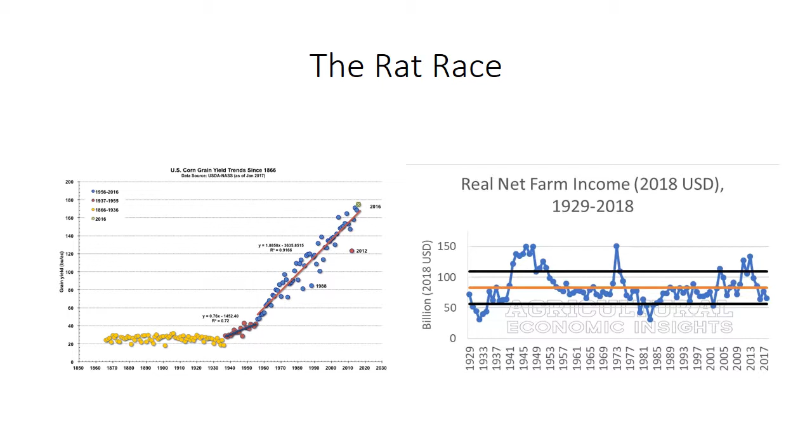So how it all started: I was looking around the internet and I saw this invention for this cover crop roller crimper, model ZRX, that was actually invented by a Mennonite gentleman in Pennsylvania. I said, that is a great invention. I got in the car and drove out to southeastern Pennsylvania and sat down at the kitchen table at this Mennonite farm with Charles and Ruth, and I said, you're going to do a deal with me. And Ruth was quite a negotiator.

Because a lot of times when you look at planting into cover crops and all sorts of things, it hasn't been very scalable. So the other aspect of underground agriculture, I said okay, look at - this was now 4 or 5 years in the past - look at the regulatory pressure happening in southeastern Pennsylvania in the Chesapeake Bay watershed. I think you guys are starting to see some regulatory pressure around the Great Lakes here in southern Canada. My other thesis was that this regulatory pressure is going to extend itself across the rest of the country, so we can kind of skate to where the puck's going and get ahead of it.

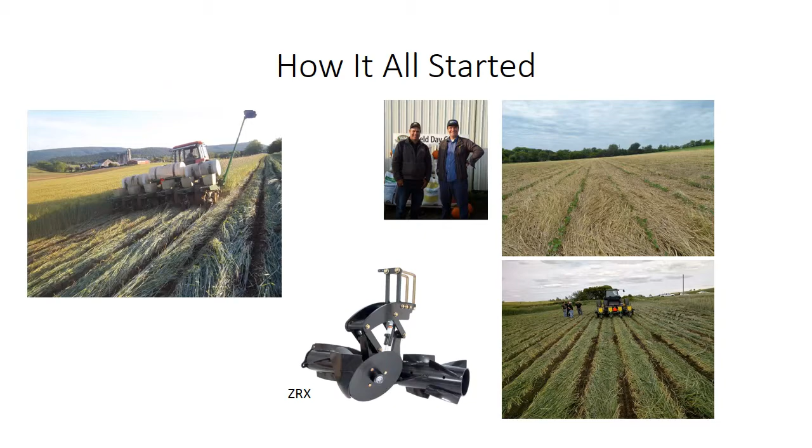And so pretty early on, we would sell this to customers, and they would grow a really beautiful stand of cover crop, usually cereal rye, and they'd plant into it, and they'd get really good-looking beans, and really good weed control. But we came to realize that...

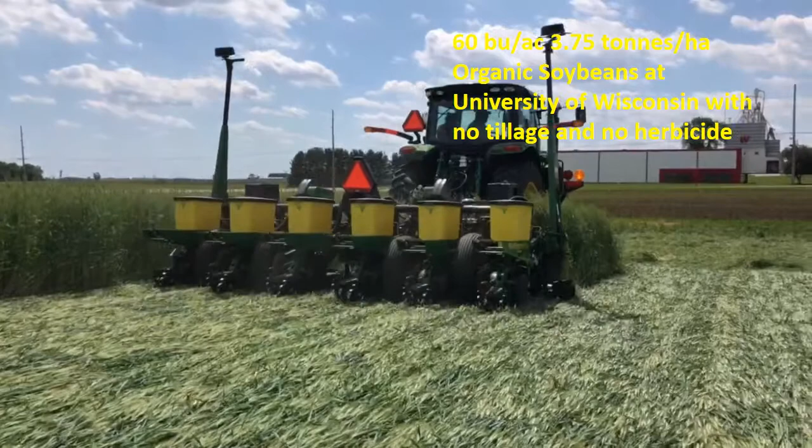Here's a little video. Last year we started collaborating with the University of Wisconsin. I think there's another speaker here from the University of Wisconsin. I think it's really valuable for us to collaborate with universities with these really well-done replicated research plots. There's something that we can get at universities that we can't get just working with end users.

Notice they're not doing any row cleaning here, okay? In organic, any bare soil is a place where weeds are going to grow. So that ZRX roller crimper device, you can either run it with a row cleaning configuration, which you would use in a conventional type of system, or with corn, you can't grow corn this way. With corn, you have to clear a path. Even though I said corn was difficult, I don't believe corn is impossible, and people do have success planting corn into cereal rye cover crops. But you have to focus on the fundamentals, okay?

And I think they grew 60 bushel soybeans, organic no-till soybeans this year. Soybeans that you could sell for $19 instead of $9.

So when you look at it, the entire hypothesis is, okay, you take your costs on one side and your revenues on the other side, and how do we maximize that kind of differential equation? And the possible returns are very high.

And I think that there will be a period of 5 to 10 years before everyone is doing something, when there will be a real opportunity to make a lot of money doing a system like this, specifically in food-grade soybeans.

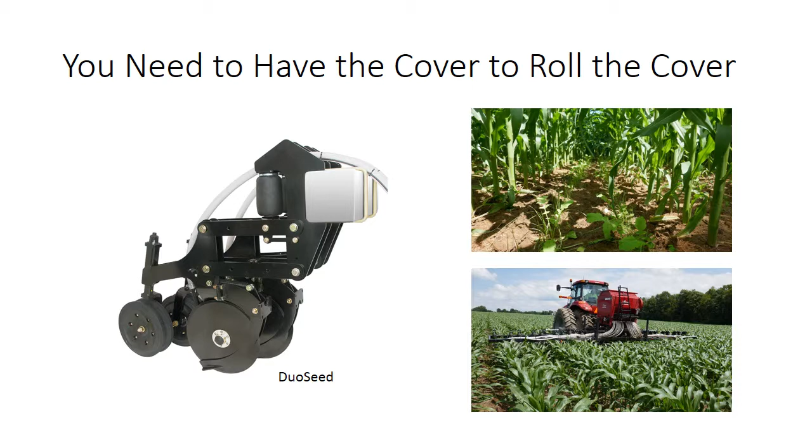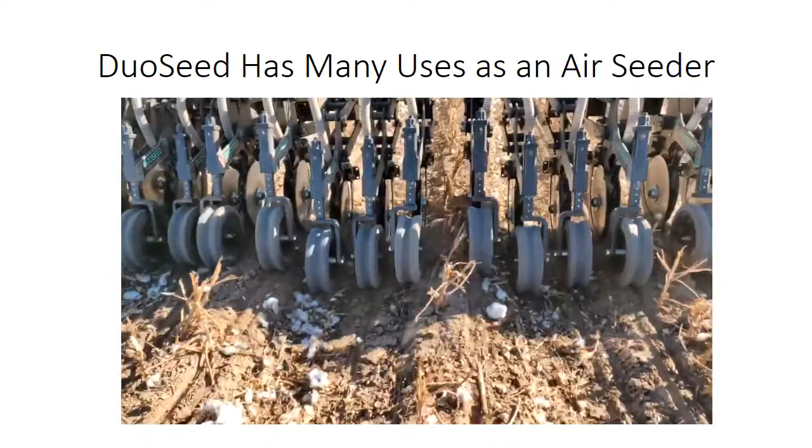And so the DuoSeed is effectively a drill. This is a video I posted on the internet where they're seeding a cover crop into a cotton stand. Also, you can put these on 7.5-inch centers if need be.

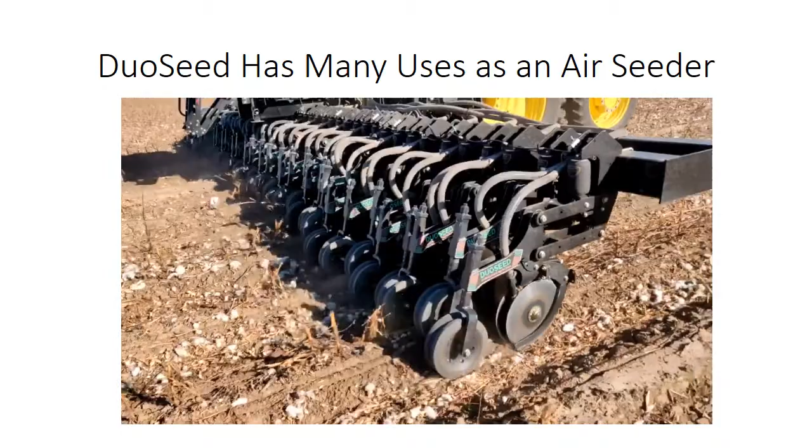It reliably grows a really nice stand. It has good depth control. It cuts well, doesn't do too much soil disturbance. So you can take a single tool, a single opener, and use it for interseeding. You could use it to seed broadacre crops, or to inject fertilizer. It goes 3¼ inches deep. So you could take a single implement and do a lot of different things with it.

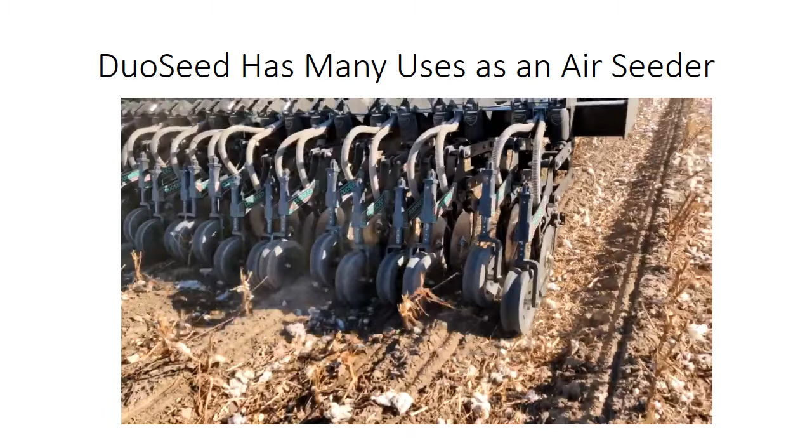I gave a presentation over in Ukraine recently, and I talked about this relay crop system, and they were blown away. They were baffled. They were just like, what? No, it's unbelievable. But you plant winter wheat,

it starts to grow, you come back in, you drill twin row soybeans in between the wheat, or single row. It starts to grow, the wheat matures, you harvest that, the beans come up. You maximize the utilization, you maximize the extent to which you're covering, right?

And so there's a certain school of thought that says, okay, well, why not make your cover crop a cash crop? And it makes sense, especially where you have a lot of fertility.

So I don't think I'm going to use my full time, but I've got more stuff, and I'm just going to fill whatever the available window is. Okay, so this is where we're literally getting into the weeds.

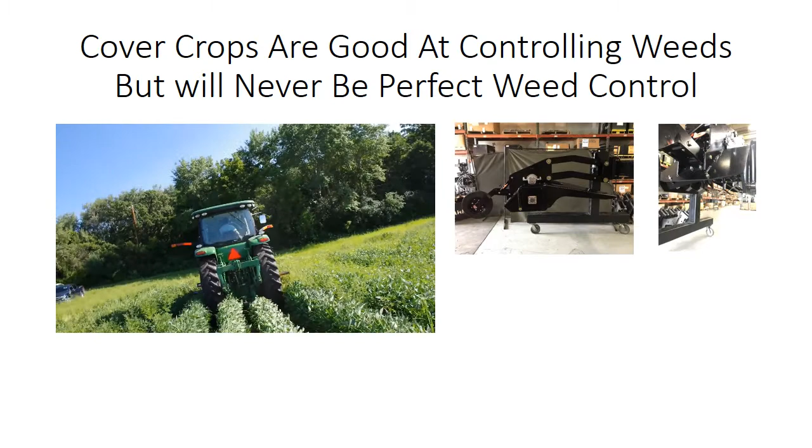So this unit, we come in, and you can kind of clean up the fields. You cut the weeds out between the rows. That's kind of okay.

Then we got into some other conditions, some really, really heavy cover crop conditions, which is like vetch makes this viney rat's nest. Or at the University of Wisconsin, we ran in this field that was like this thick buckwheat cover crop.

Because that's the next generation, where you're using... I'm very interested in systems where living mulch systems where you're using the cover crop not only to control weeds, but you're planting legumes in a system with corn in order to generate nitrogen for the corn. And that's another alternative use for the RowMow too.

So we'd go into these different fields and it would just bog down. We couldn't get enough power to it because the power management of the RowMow is actually hard, because again, we have to be able to make a system which is scalable and can get out to 11 rows as our target for this year.

And so we were generating way too much heat. We weren't getting enough torque to the flail and everything like that. And we said, okay, we need to take an alternative approach.

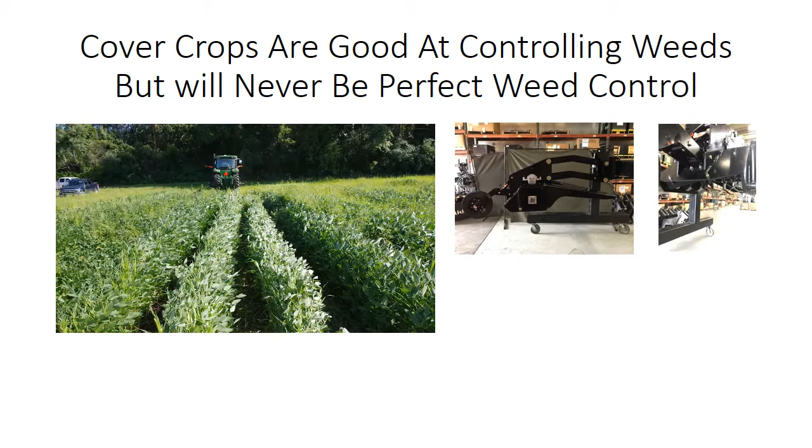And that's when we made the new RowMow, which is a sickle. And I just had this at the National Farm Machinery Show, and people would come by our booth with these looks of absolute bewilderment.

You know, just what kind of crazy stuff are these guys up to now?

So basically what you do is you've got a vertical shaft that has two sickles, one of which goes between the rows and one of which cuts either rye regrowth or weeds that are coming up through the canopy of the beans. And you can adjust the height of the top sickle.

And they move in opposition so that they're constantly trying to balance the forces. They don't balance the forces well enough. And that's like, you've got a lot of energy. You have a lot of energy in that thing.

And we definitely need to focus on safety. We'll do the safety testing at Woody's farm in about, let's see here, a couple months now. Stand behind it, you know.

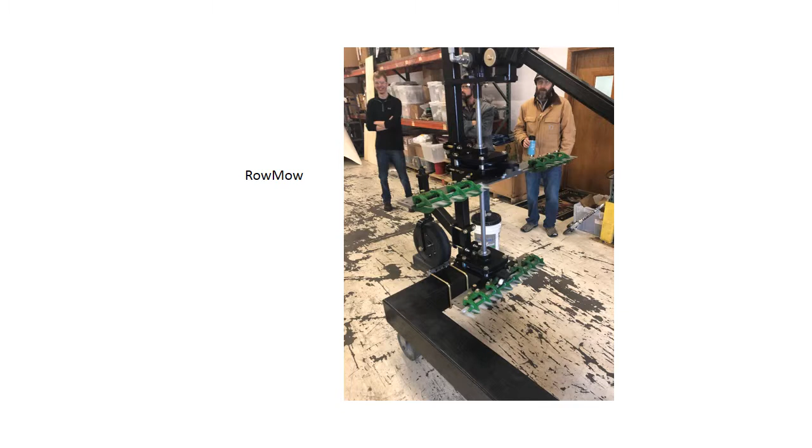And so I put this slide in. I'm going to pivot to a different direction now. So to summarize before, the strategy with Underground Agriculture is we take organic no-till soybeans and we produce a comprehensive set of products that enable real-world adoption for customers. So we try and produce every piece of the puzzle that you need. And part of that's with the planter. I'll go into the planter a little bit too if I have time, because how you have your planter set up is very important to having success.

I have a daughter, she's 3, and I go to the grocery store sometimes with my wife and buy food for her. You look at it and think, okay, you've got this food, or you've got this organic fruit, and even for me as a quote-unquote agricultural professional, I find it difficult to parse exactly what's going on and what's better and what's not.

One thing that really irritates me is these quote-unquote organic strawberries that my wife buys for my daughter, because they're flavorless, bland, all the essential strawberryness of these things is just gone. But they're organic, so they're great, right?

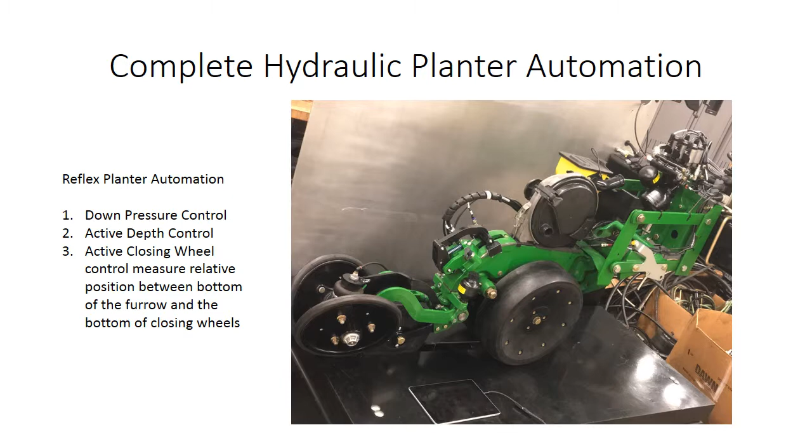One of the really interesting things about this system is it's a digital electrohydraulic system. We manufacture the system that's on the new John Deere planters.

I'm not going to spend a ton of time on it, but effectively what you're doing, and the way most of these systems on the market work, is that gauge wheel load has a target set point. Gauge wheel load goes down, system increases pressure; gauge wheel load too high, system decreases pressure.

The art form in terms of getting the maximum accuracy out of the planter is to do that as fast as possible. So the rapidity with which you can make a hydraulic adjustment to the system directly correlates with the accuracy of the planter control system.

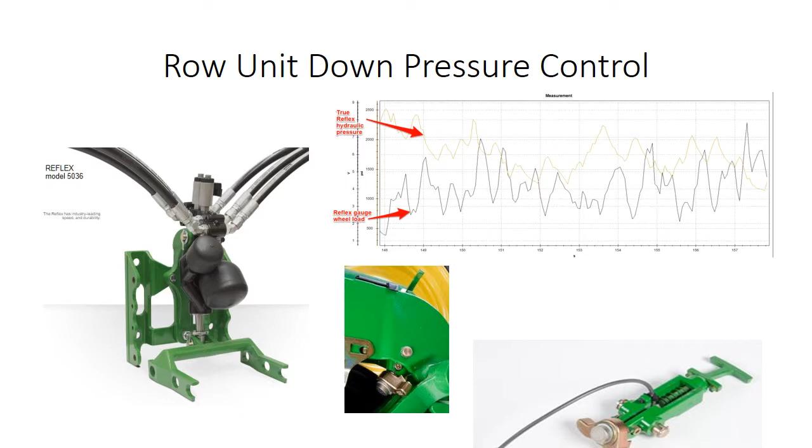Notice with our systems, we actually use 2 valves. So we use 2 simple poppet valves that open and close in about 30 milliseconds, increase, decrease, increase, decrease. That's how you do it, to try and keep it on the target.

The other thing I'll say is lower gauge wheel load is not always better. You need, in dry soil, you effectively can't run too much gauge wheel load. When in doubt, you're better off running too much than too little, in my opinion.

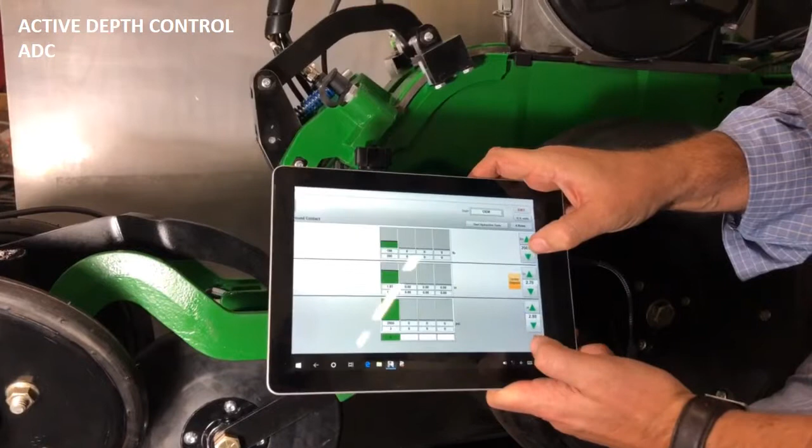So we've got the active closing system, or this is the depth control system, which can actually change how deep the planter is planting in real time. It will also map the bumpiness, the true surface of the field.

And for this spring in Kansas, we'll have a system that adjusts the depth of the planter for the first time based on soil moisture, so that you're changing how deep the planter is planted based on how wet or dry the field is.

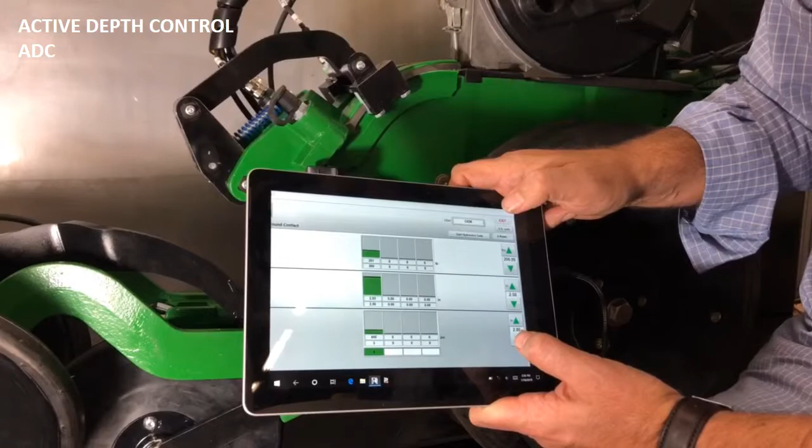The RCX closing wheel is good for organic no-till soybeans. So you're planting, you've got a mat of residue this thick, and you're trying to plant a bean into it that you want to plant that deep. So how do you do that?

First of all, you get really good seed to soil contact. So we have this new closing wheel system that has a rolling firming wheel to firm the seed down, and then it casters side to side to keep itself steered and centered on the row.

What it does is it measures using this firming wheel. The firming wheel runs in the bottom of the furrow, and that becomes effectively a datum line for where the seed depth is. Then we measure the relative depth between the closing wheels with a sensor and the bottom of the furrow, and we hydraulically adjust the closing wheels so they maintain a fixed position relative to the bottom of the furrow at all times. It's not a pressure control system, it's actually a depth control system.

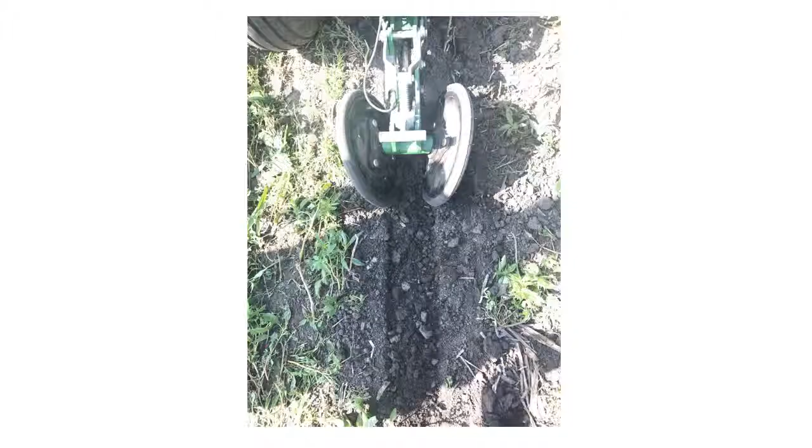And it makes an appearance on the soil after you plant that doesn't look like any typical closing system. It doesn't leave a conventional double line where the closing wheels run.

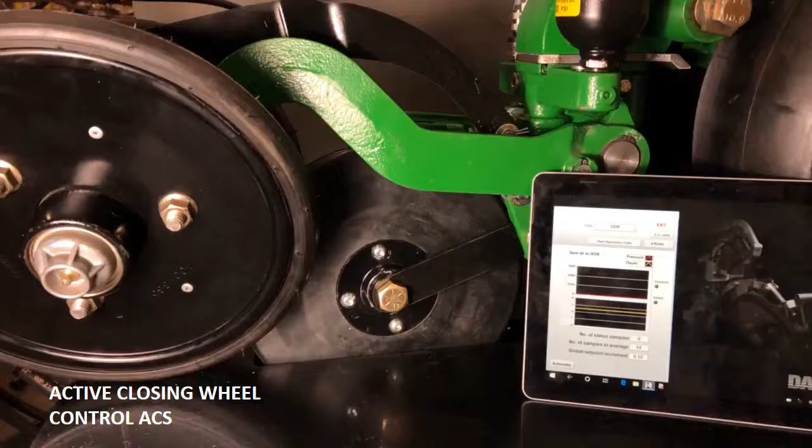What it's doing is you're setting a deadband. So you're saying, okay, if the position of the bottom of the closing wheels relative to the bottom of the furrow changes more than a 1/16 of an inch, we will decrease or increase the pressure.

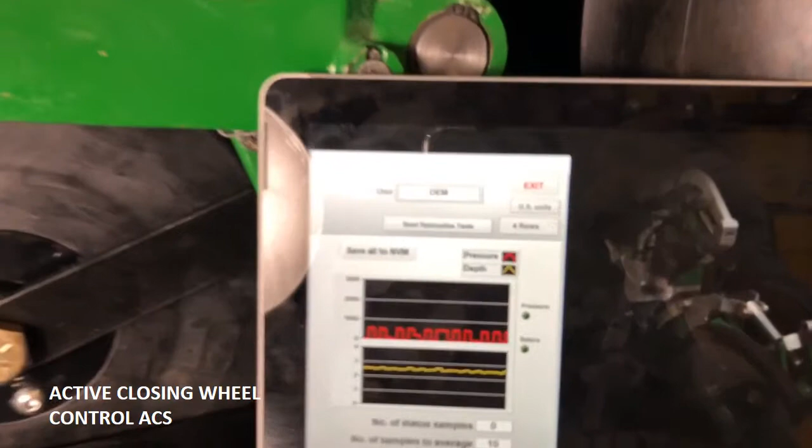All of these hydraulic systems are hydropneumatic to make them less jerky. They all have a nitrogen pressure vessel, and they're all digital. Instead of using a pressure control valve where you're driving a coil into it and trying to control the pressure with a reducing-relieving valve, we're pulsing — just pulsing little tiny bits of oil in or out as fast as you can.

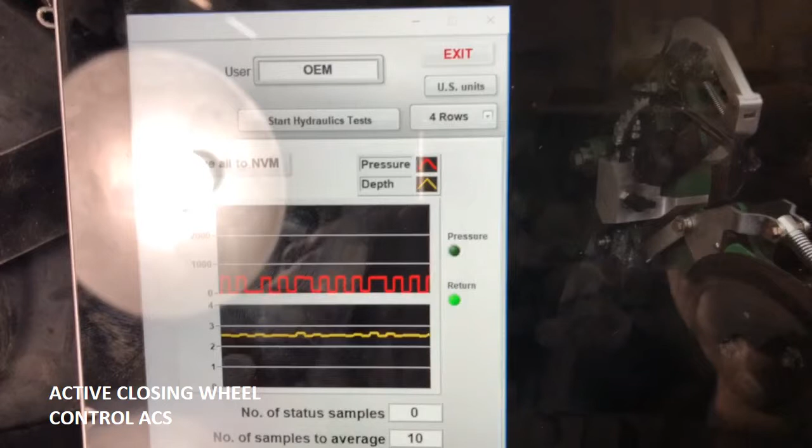One thing that really irritates me when I go out with my customers is the closing wheels on the planter are always off, they never stay straight. I've stopped suggesting customers put their closing wheels in the staggered position anymore because it makes them steer off over time. And if you have a larger planter, it gets worse — you'll notice the ones at the end of the frame are always off because there's just a slot there, and they're never on center. It drives me crazy.

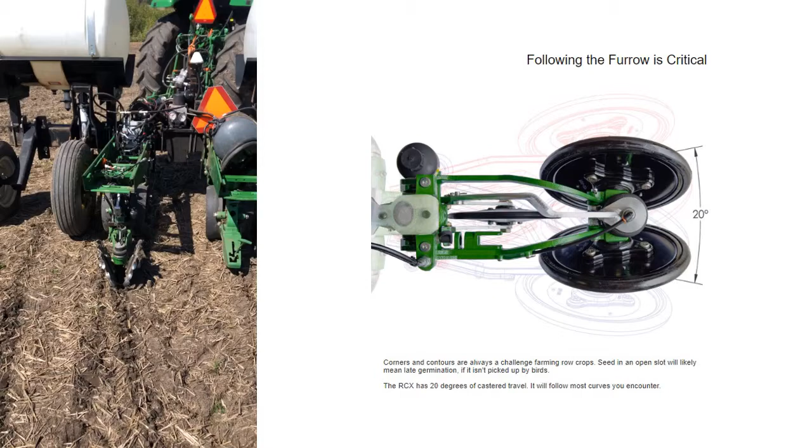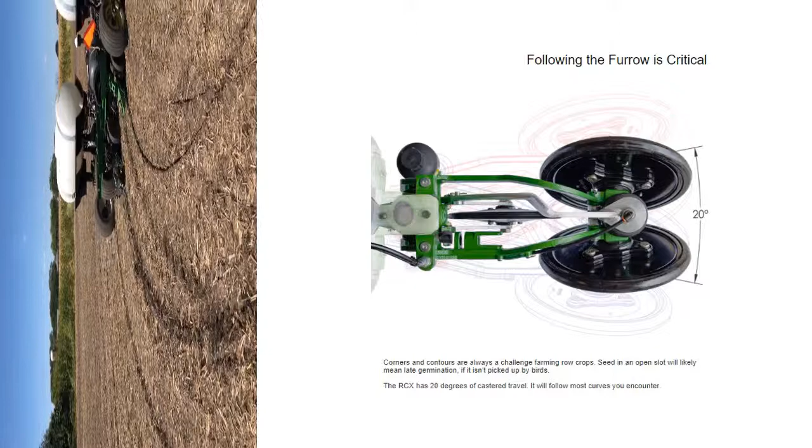So this system actually casters in order to... great sideways video, Joe. We're thinking orthogonally here.

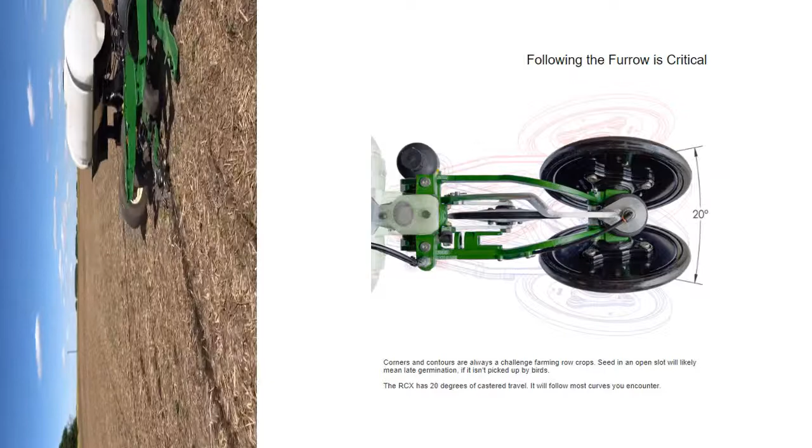This part is just showing how sharp you can turn in the ground with it still closing in the furrow. So if you do a lot of turning in the ground, a lot of uneven terrain, that's going to be a good fit for you.

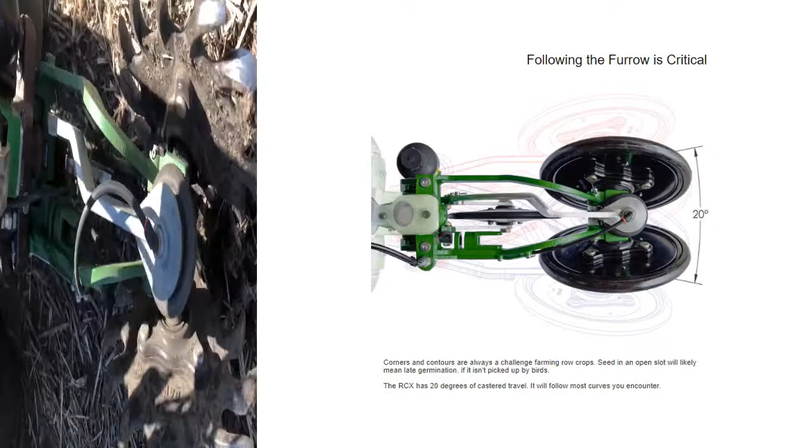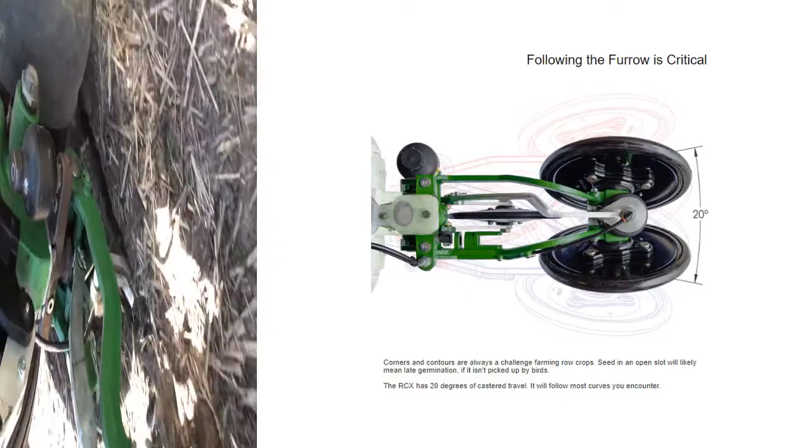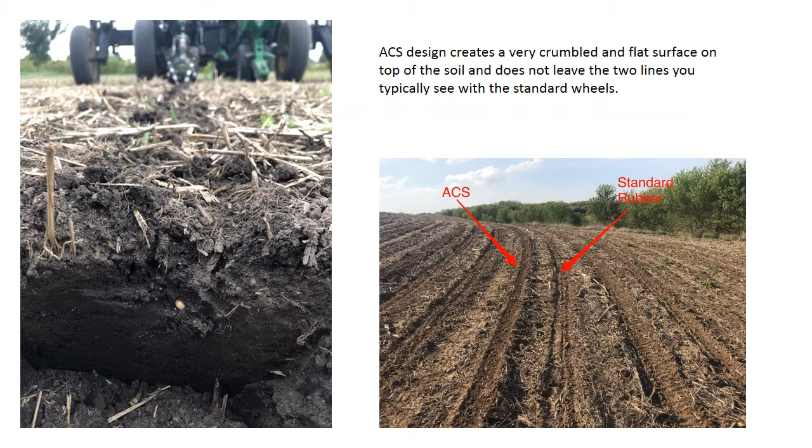You can see the really beautiful seed to soil contact you can get out of that.

This year we're moving to an iPad-based control system that has 7 different data layers you'll acquire while you're planting.

I believe in the future — and this is almost the right brain and left brain part of the earlier part of my presentation — when we manufacture things, we make really high precision things, and we use coordinate measuring machines to check our parts. We get these from Carl Zeiss. We have 2 of these super high precision machines that are effectively the basis and standard for all the dimensional accuracy of everything we make at our company.

I do believe that in the future your planter will be almost like a certified instrument, where you as the operator will have very little control, you'll pay a ton of money for it, but you'll take it to the dealer and get a certification, and it will effectively be an instrument. If something goes wrong, you'll be able to hand somebody a piece of paper and say, sorry, my instrument was calibrated — and that's what the future of automation is going to give us.

You're going to be spending more money, but you'll have less risk in some ways because the equipment will become calibrated. Like here, you're a custom planter and you plant a field for a customer, and the seed guy probably blames the planter — he says, oh, he planted it too shallow or something, because the seed guys always blame the equipment guys.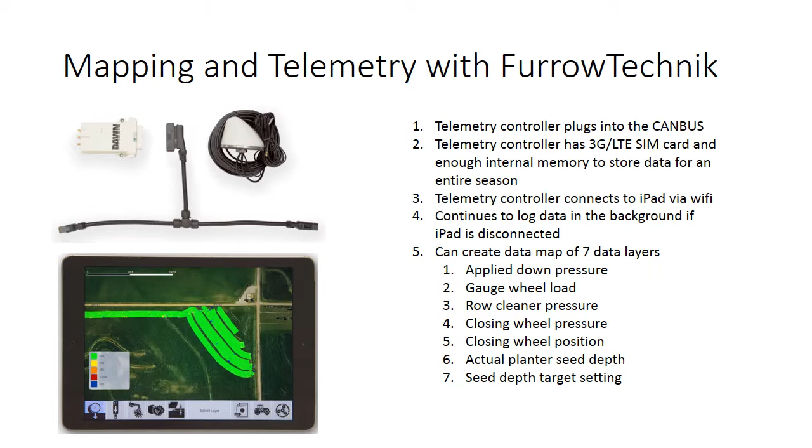And you're like, nope, here's my certified report saying exactly how it was planted — it was planted at this depth, this was the target depth, and this was the actual depth at this position. We're moving to a 5 hertz data frequency, so you're getting 5 data points per second, and you can see every parameter about how it was planted.

Okay, back to cover crops. The closing wheels are going to be a really big deal. First of all, the biggest deal is if you want to have success planting into a really heavy cereal rye cover crop like I was showing earlier, you must do one thing: have the narrowest possible gauge wheel on your planter. There are ones on the market now that are only 2 inches wide. The narrower it is, the less crop material you have to push out of the way.

Just because you're planting green doesn't mean you don't have to focus on the fundamentals. One thing that drives me crazy every spring is when I look on the internet and see someone say, I'm planting green because some well-intentioned extension agent convinced me to, and I hate that because you're not set up right. If you're not set up right to have success, I'd rather you not do it, because if you have a terrible outcome your first time, you'll be turned off, and it'll be impossible to get that person who was otherwise willing to try a new practice to get them back into it. Don't try it if you're not set up right.

Okay, the two things: you have to have narrow gauge wheels, and you basically need an automatic down pressure control system on the planter, whether from us or from a competitor, from anybody. Those two things. And three, you have to have a lot of weight on your planter - 300 pounds per row minimum, and I'd like to have 500. Lots of weight, narrow gauge wheels, automatic down pressure control system - those things come first.

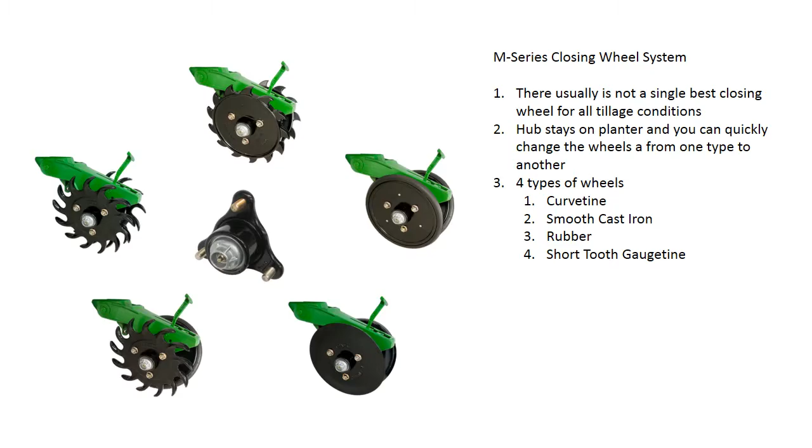I'm running out of time here, so I'm going to move over the closing wheel talk. One of the reasons why we came up with the M-Series closing wheel system was a recognition that there's 20 or 30 different no-till closing wheels on the market right now. Anytime you see such a proliferation of different designs, to me it basically says we're not solving a first concept problem. The reason there's so many different individualized closing wheel designs is because everyone is solving for a localized condition. But the real fundamental problem is depth control.

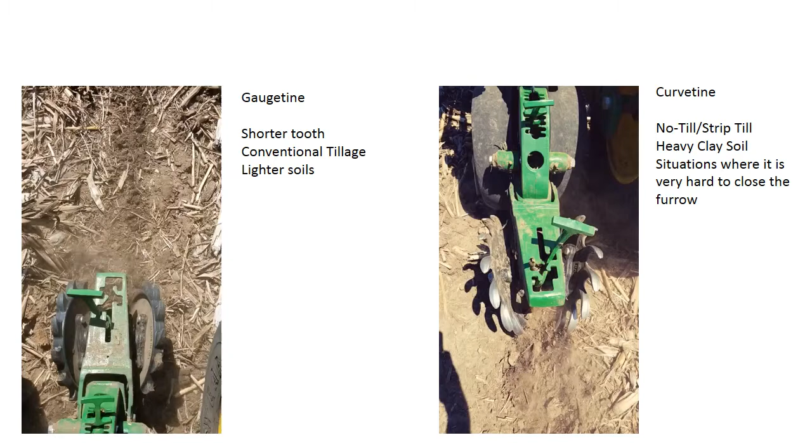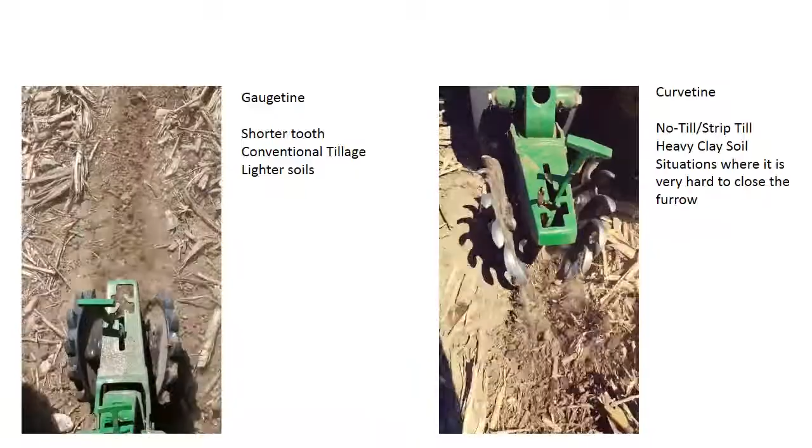So the broader theme around everything we do is about controlling depth. With ground engaging equipment, the vast majority of performance-related issues come from changing the depth that something's going into the ground as you go across the field. Gaugetine, pocket wheel, Curvetine - they last a really long time. There's good products in the market. There's been real growth in these lower cost plastic closing wheels - they're okay, especially if you do conventional tillage, those things are fine. What we're going to give you is a wheel that costs 30% more but lasts 200% longer. That's what we're here to do.

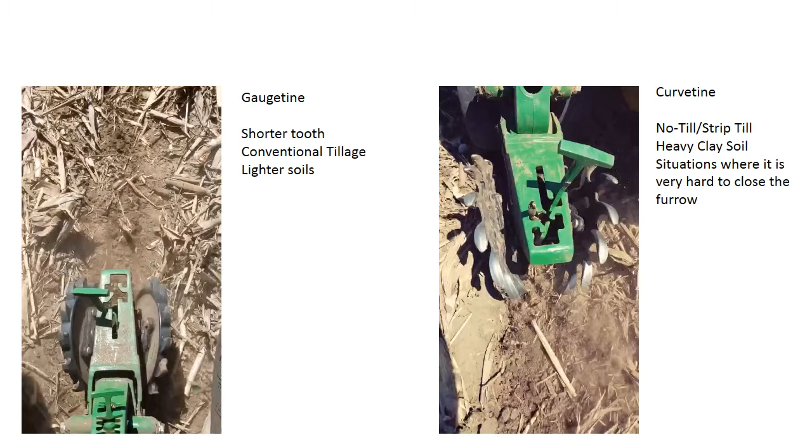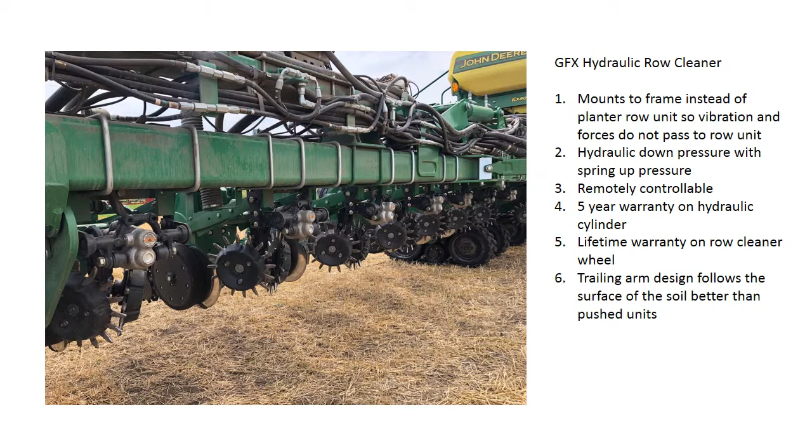The hydraulic row cleaner products - you guys are familiar with this kind of stuff. They're frame mounted. They take the force on the row cleaner off of the row unit. It's remotely controllable - you can just turn around, look through the back window, and dial your knob to get an immediate result out of it. It's a trailing arm instead of a pushed arm. The analogy is, would you rather push a heavy wheelbarrow uphill or pull it? By being pulled, it inherently follows the surface of the soil better and clears the residue without doing as much soil disturbance.